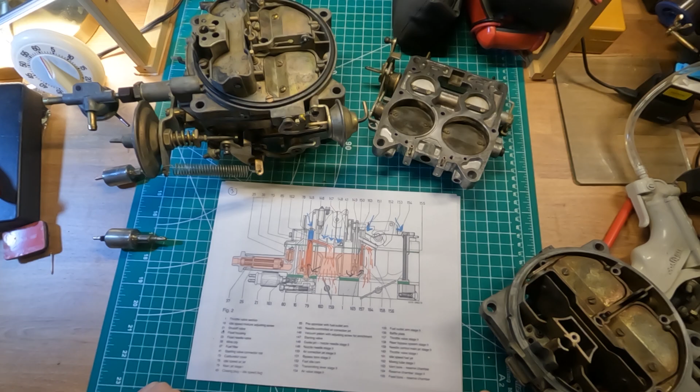If you need to see how the primary throttle valve works, you can check out another video. This time we're going to talk about this part of the carburetor.

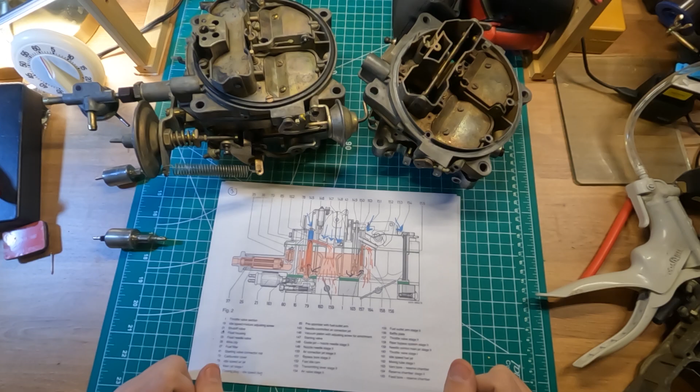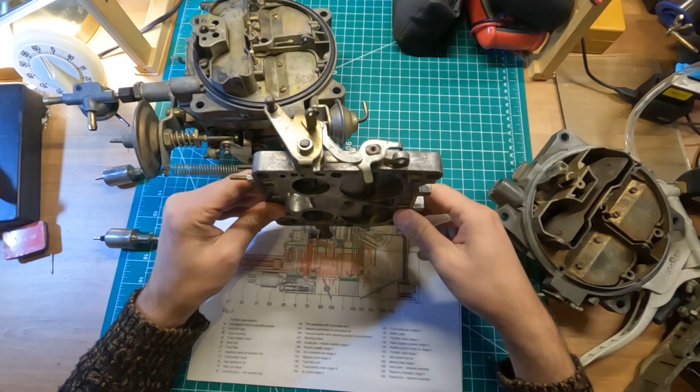Right now we're driving at, let's say, highway speed, at 70-80% of our driving, and then we need to get more oomph from the engine, kind of reaching the maximum of what this primary valve can deliver. Just to show you, this is the bottom plate, like this. Those are the primary throttle valves, and those are the secondary throttle valves. I'm just going to show you how it operates.

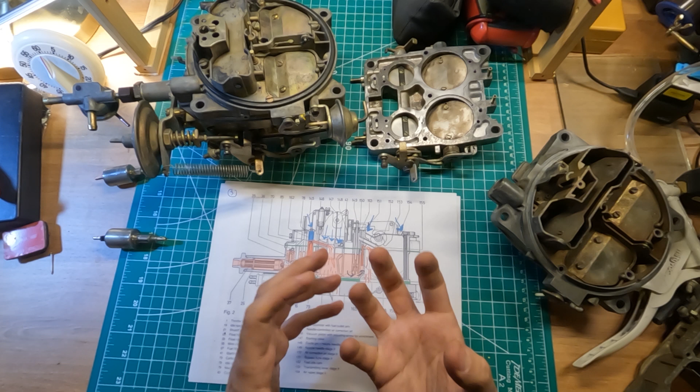So it opens, and as you can see, before the primary reaches 90 degrees, this valve starts slowly opening up. When this valve slowly starts opening up, vacuum, which is this powerful force from the engine where it tries to suck anything it can inside the engine, inside the pistons, starts pulling the fuel from the fuel bowl right here into this little passage. Then a little bit of fuel mixed with a little bit of air coming in through those imperfect closings of this air valve gets mixed in, and more oomph comes to the engine.

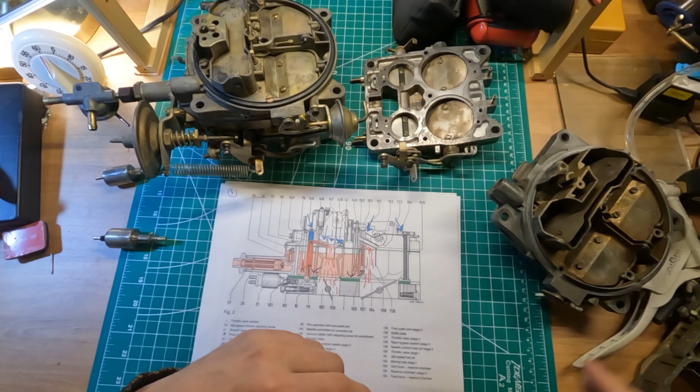Let's see if I can show you. This is the top of the air horn, exactly the same. Let me get a light. So you have those passages right here. It's a very simple system where you have this tube, and the fuel comes out through those holes right here.

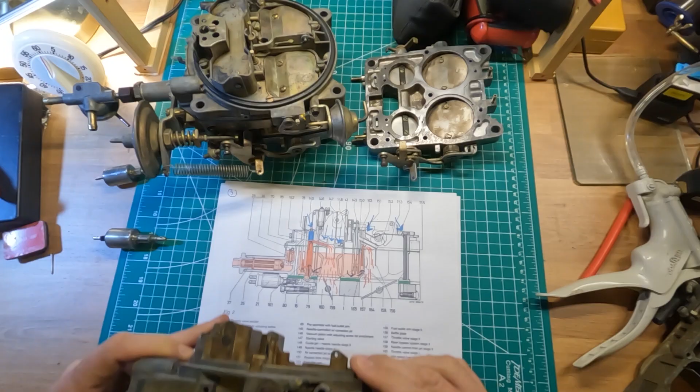It's that simple. Now what ends up happening is at some point the vacuum holding this dampener - normally the vacuum from the engine pulls on this dampener in such a way that it stays hard, you can't even open it with your finger, you have to really force it to do something like this. But at some point the vacuum lessens, this dampener gives in, and the air valve is being opened farther and farther through the forces of the engine, right here, opening farther and farther.

As that happens, a few things occur. When this air valve starts opening up, this whole thing starts moving. Let me put it at an angle so you can see this whole mechanism. Let me explain what happens inside the engine - let me go to the schematic.

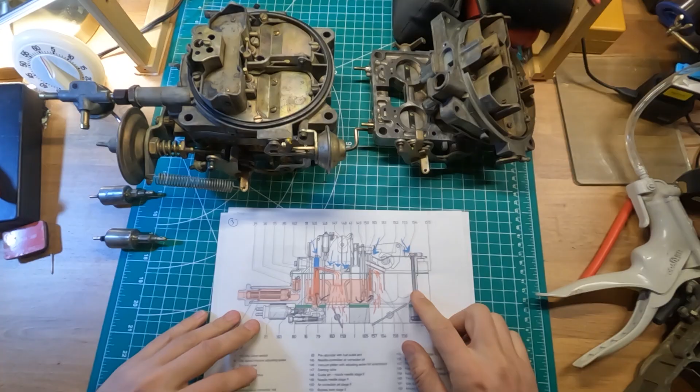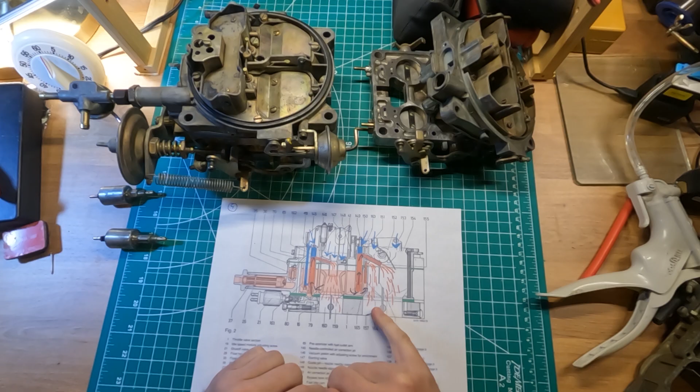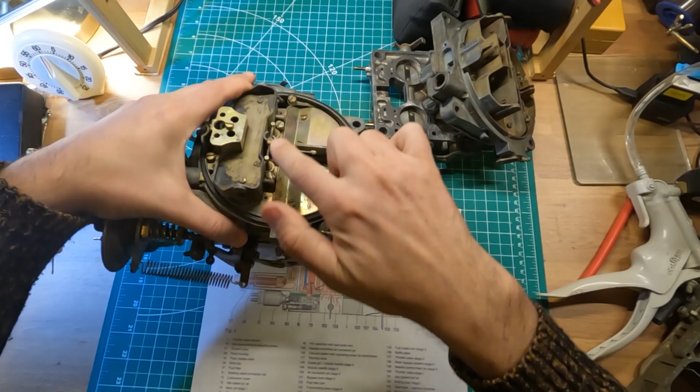So now we're opening the secondary throttle plates farther and farther, and now we have a bunch of fuel coming in, not only through our mains - tons of fuel is being dumped into our main throttle plates. Now through our secondary throttle plates, also lots of fuel is coming, not only through that little hole I showed you where the tube goes in and fuel gets sucked out, but now also because this whole device is moving up, that allows these metal rods, two of them, to lift, and through that the fuel can be pulled through this bigger tube, two of those tubes.

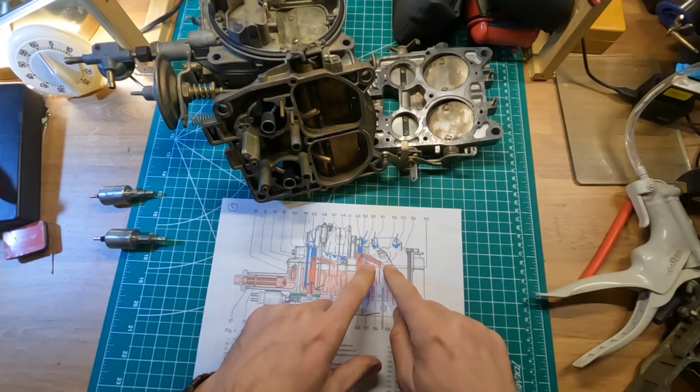This one is a stripped down version, so compare those two things. Now the fuel is being pulled through this tube and starts coming out through those right here, mixed with some air that also enters this tube. So now we have an insane amount of fuel being pulled from the engine, from our primaries and secondaries. And because those air valves are open like this, you have tons of air also coming in. So you have lots of mixture, lots of fuel coming into the engine and producing the sound we all enjoy - the engine at its highest RPM and highest pull.

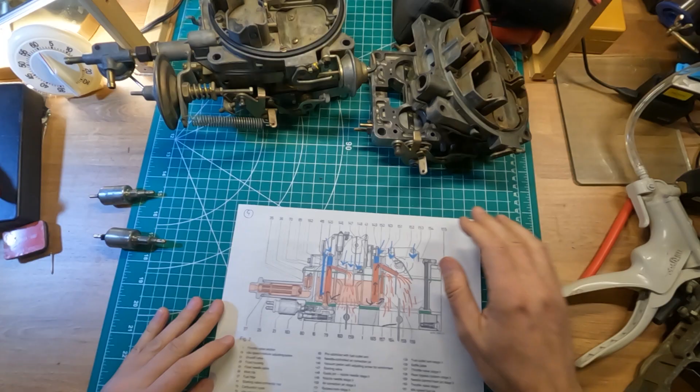And that's basically how this stuff on the Solex 4A1 is working. Let's show that for the point of clarity - again, those are drawings from the manual, so if you have the manual, you can study those drawings.

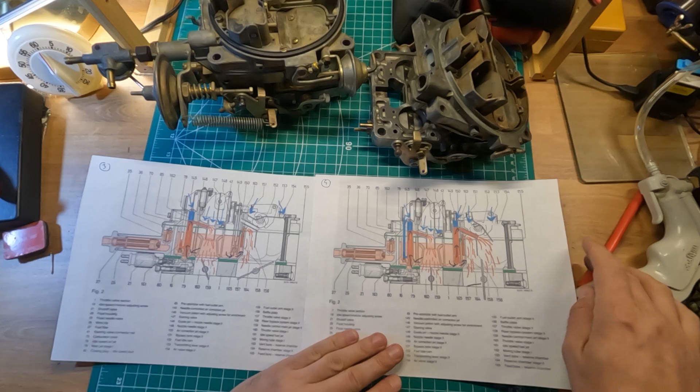You can compare those two drawings - there are some differences. Here the primary throttle valve is open almost totally; in these drawings it's open maximum. As you can see here, the secondary throttle plate is partially open, and here it's open to the maximum. If you follow, you can see certain differences: at partial or high force throttle, all the fuel only comes out through this opening right here, and at full throttle force, it comes out through this opening and this opening at the same time.

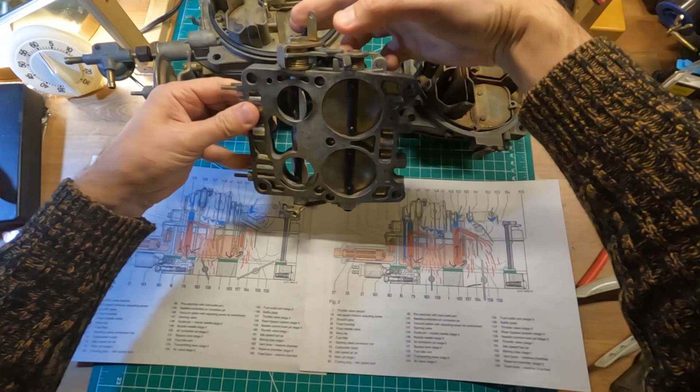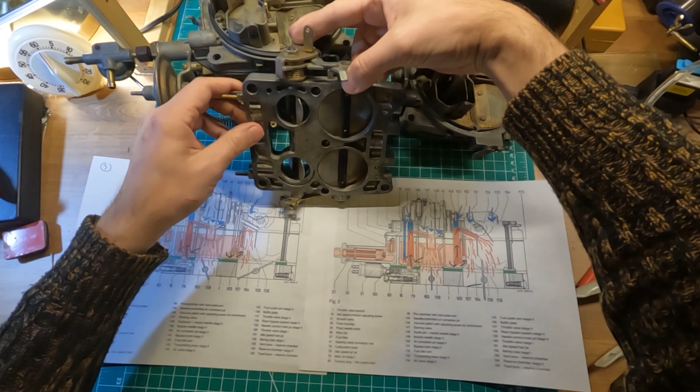Those are the main differences. Let me show you - I'll go from the bottom. So we start opening the throttle, driving at our typical pace, and then we need a bit more oomph, so we put our foot on the pedal farther. Now the secondary starts opening up a little bit, so right now we're in this scenario, and now we go farther and farther. Now the primary is almost totally open and the secondaries are quite open, and now we're in this scenario.

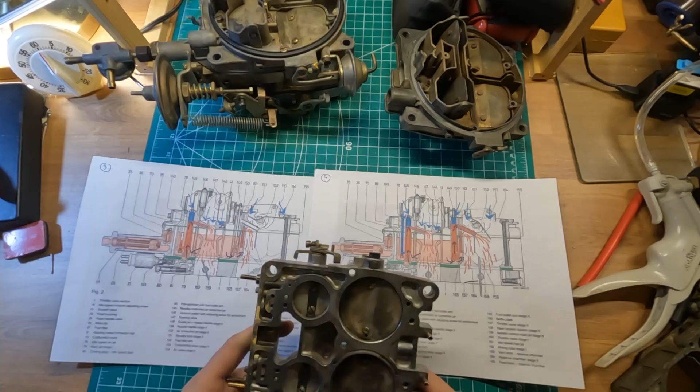I hope it makes sense, and I hope it helps somebody figure out how to work on their car's Solex 4A1 carburetor. Alright.